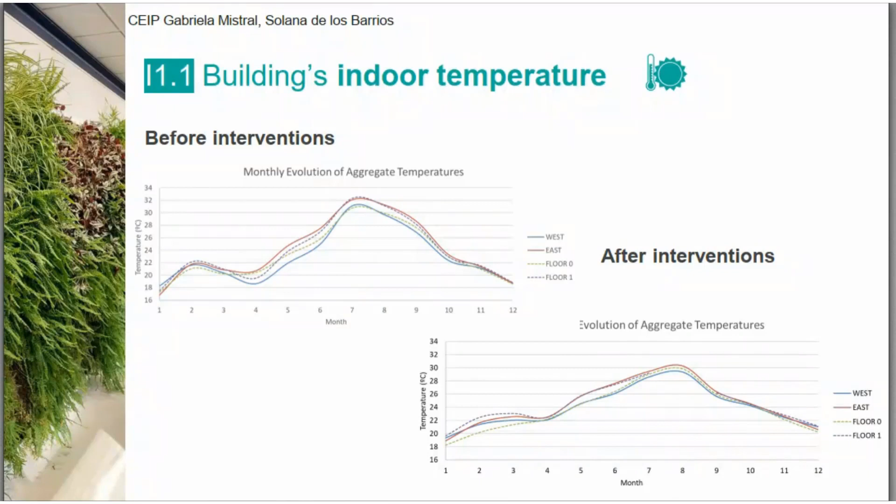An application of this indicator could be to assess the impact of installing a green roof. To do this, data from two classrooms located on the same east-facing facade at Solana de los Barros School were collected. One of them was situated under an intervened roof, while the other, used as a reference, was on the ground floor with a floor between the classroom and the roof.

In general, it can be observed that temperatures under the green roof have been lower than expected compared to those in the reference classroom. Furthermore, the month of May 2022 had average temperatures more than 1 degree higher than those of previous years inside the school. Additionally, if we analyze the average temperatures of the area using data from AEMET for Mérida, there has been a 9% increase in daily average temperatures in 2022 compared to previous years.

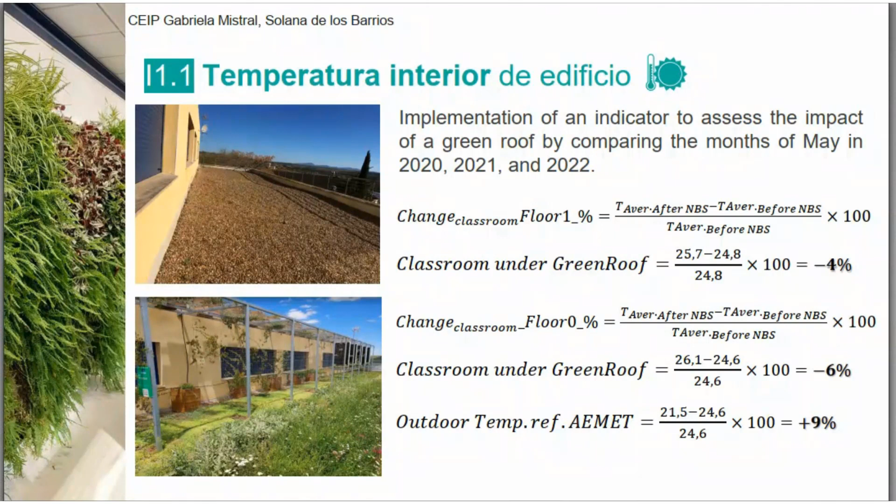For the building surface temperature indicator, the thermal images of the school Gabriela Mistral envelope are shown. The entire envelope was photographed before and after the installation of the NBS. This and the next slide show the images taken on the 8th of June of 2022, 7 months after the end of the construction of the solutions.

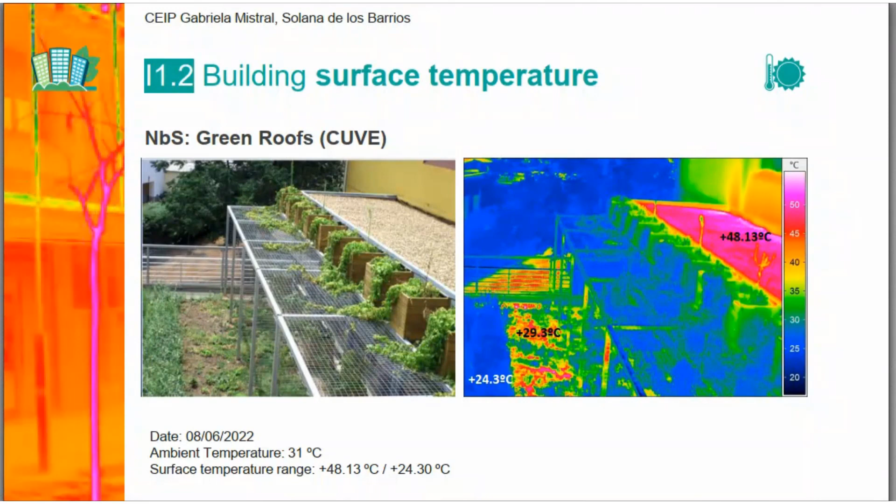The surface temperature of the roof is affected by the installation of the three types of green roofs. The thermal images show that the surfaces of the green roofs have a lower surface temperature than the original gravel roofs. The difference in temperature is very notable, and there are also differences between the green roof types depending on the type of vegetation and the degree of vegetation cover.

In this slide, we see the thermal images of the east facade where the FAVE system is implemented. The thermal images show that the surfaces associated with the FAVE system have a lower surface temperature than the surfaces that maintain the original characteristics. This is thanks to the shading provided by the system. At the moment, this difference is smaller, mainly because the vegetation has not yet completely covered the structure, having a lower impact.

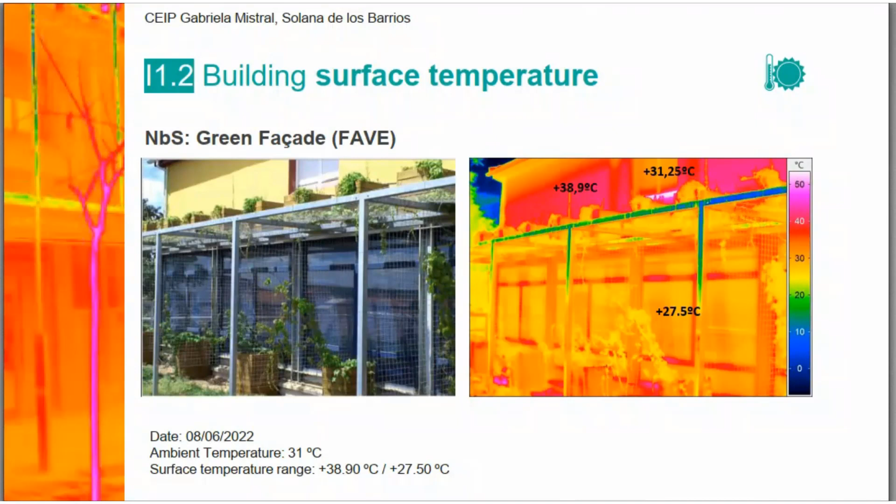To assess the impact of the solutions on the external environmental conditions of the building, we can observe that in general, in 2022, outdoor temperatures were 9% higher. However, on the east facade, the one subject to overall intervention at the school, there was a decrease of 1% in average temperatures and 17 in maximum temperatures. This is primarily associated with the partial shading of the facade already achieved.

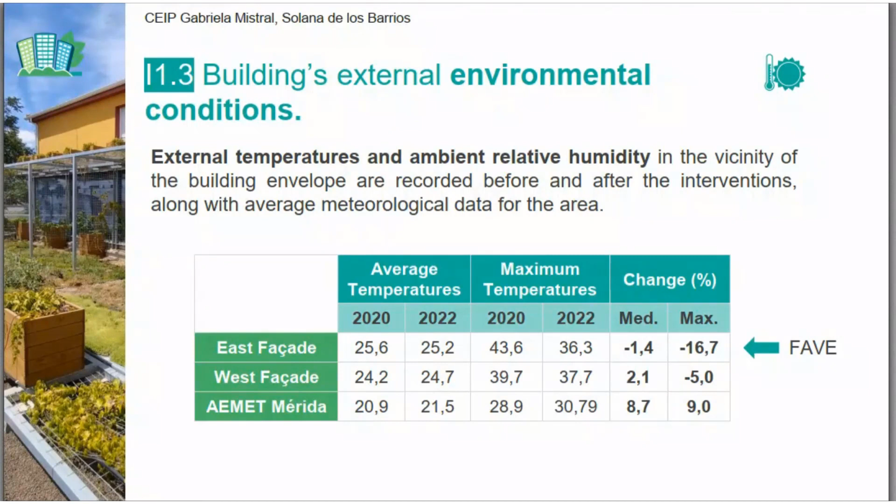On the west facade, there is only a 2% increase in averages and a 5% decrease in maximum temperatures. It is important to note that the facade interventions still had the vegetation underdeveloped, although irrigation is underway and having an effect. Hence, greater reductions are expected in the coming years.

This indicator shows the reduction of the cooling demands thanks to the application of NBS through dynamic building simulations. The modeling of the energy savings produced by the implementation of NBS shows that by adding the different solutions, a reduction of cooling demand of more than 50% can be achieved.

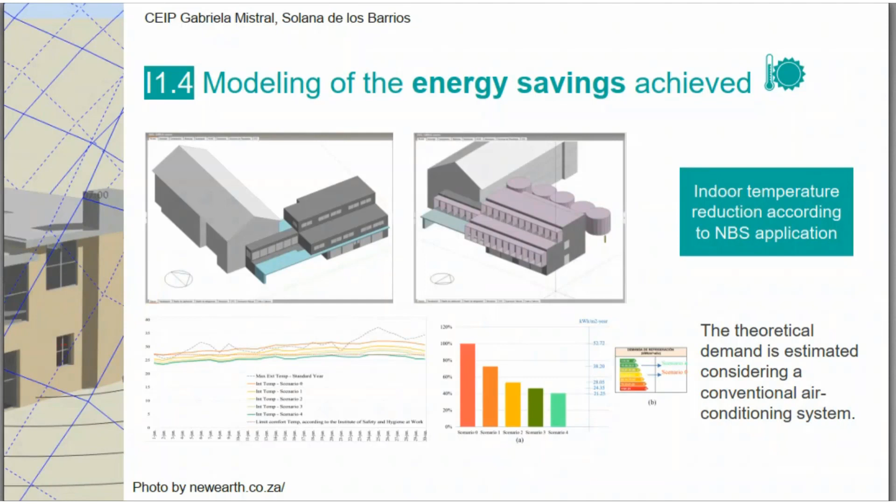It is important to note that these results can serve as a guide for the starting point of analysis. Further research is needed to investigate the behavior of the different solutions in order to achieve greater similarity between the actual performance and the results shown by the simulations.

The results of the water management challenge indicator are shown next. During the construction phase, an increase in water consumption is observed due to the construction activities themselves, and also in the first months of operation of the NBS, as the plant requires more careful watering in order to root well and not die. However, the effect of long-term savings is expected to result in effective savings in irrigation. The image corresponds to the school in Oporto.

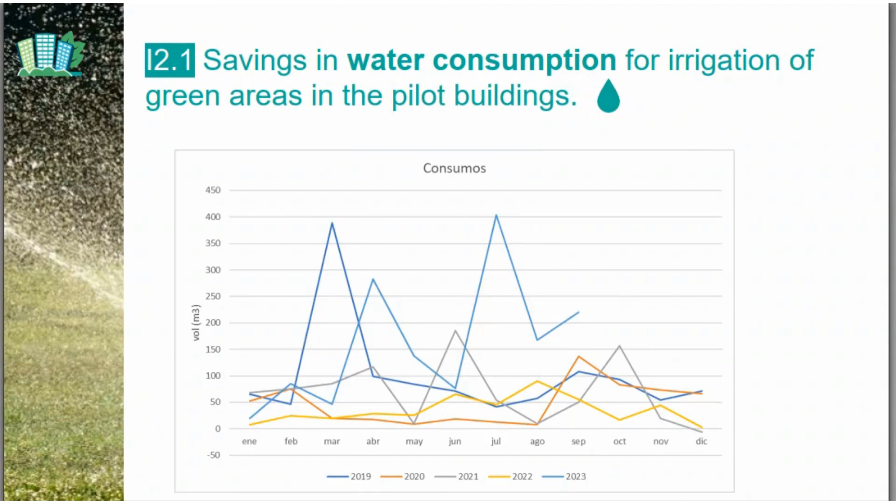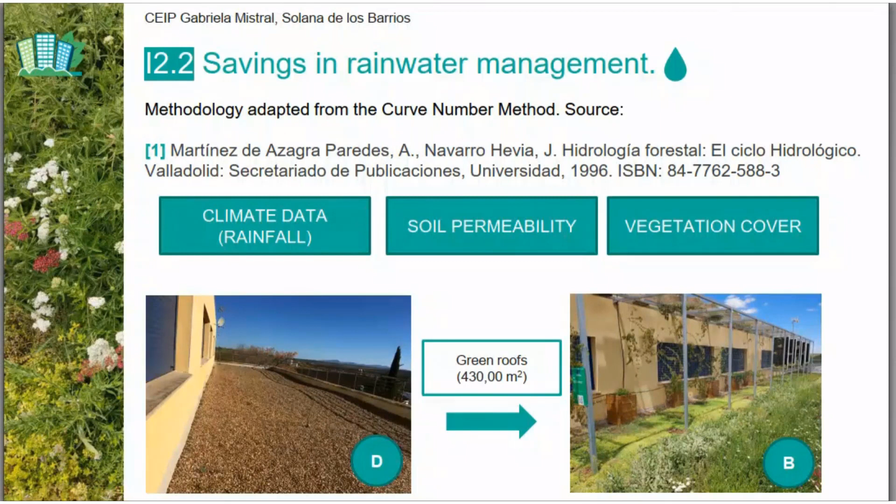The method used is an adaptation of the curve number method to the type of roofs. We have analyzed the change in roof type in terms of permeability and calculated how much water is captured before and after the installation of the NBS. After calculating the values of catchment and runoff, an ex-ante and ex-post evaluation has been carried out, theoretically estimating the percentage of runoff water in both cases.

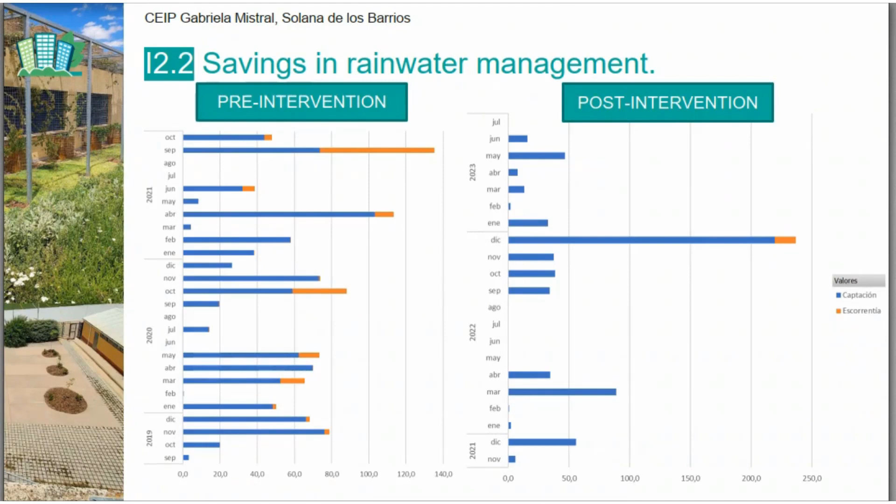In the pre-intervention situation, it is estimated that 952 millimeters of rainwater has been captured and a total of 143 millimeters has been emitted by runoff, which means a loss of 13% of water by runoff. In the ex-post situation, it is estimated that 635 millimeters of rainwater has been captured and a total of 17 millimeters has been emitted as runoff, representing a loss of 3% of water through runoff.

The results of the indicators of the Green Areas Management Challenge are shown next. In the case of Solana, there has been a significant increase in biodiversity since the installation of the NBS. In the baseline sampling, 29 species were counted, which increased to 70 just after the installation of the NBS and subsequently increased by a further 36 species. This brings the total to 91 species in June 2023.

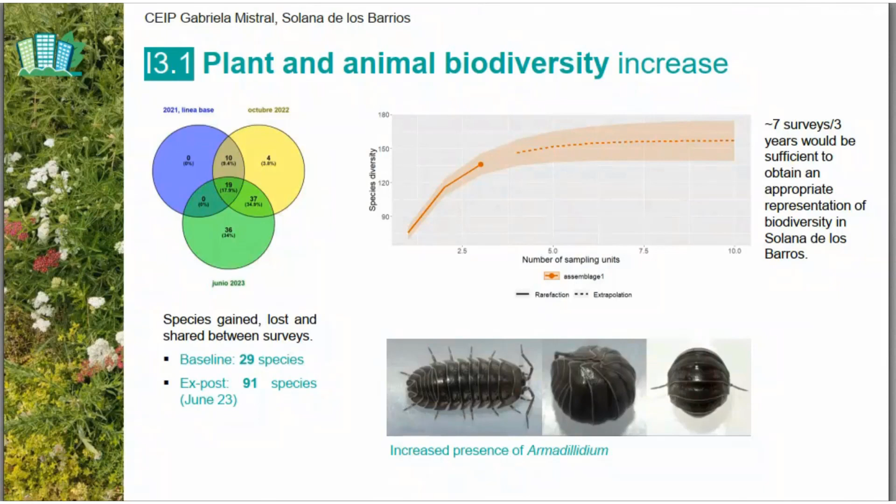While none of the species planted in the NBS have been lost to date, their density has decreased, while the density of native species that have colonized new areas has increased. Analysis of Hill numbers to estimate the number of observed species, characteristic species, and dominant species indicates that the total number of species estimated for the area is 157, with expectation of reaching the figure after 7 surveys or 3 years. Of particular importance is the increase in population of several species of bugs because they are detritivores capable of metabolizing heavy metals and thus removing them from the substrate.

In the baseline carried out before work began in Solana, 50 plant species were found, all of them ruderal and of little landscape value. The aim of the plant species initially planted on the green roofs was to facilitate colonization by native species over time. Indeed, 14 months after the planting of the NBS, the green roofs have been colonized by 17 additional native species, some of which already cover a considerable area, while the plants used in the planting reduce their area.

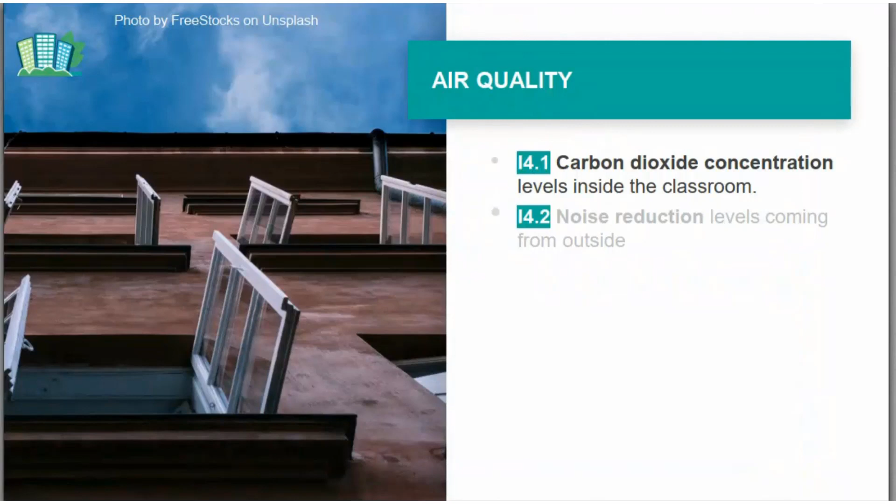The results of the air quality challenge indicators are shown next. Below are the initial results of the indicators for carbon dioxide concentration levels inside the classroom, the profile of average CO2 concentration in classrooms, which provides an insight into indoor air quality, and the level of ventilation, which has been significantly altered due to changes in habits following the COVID-19 pandemic.

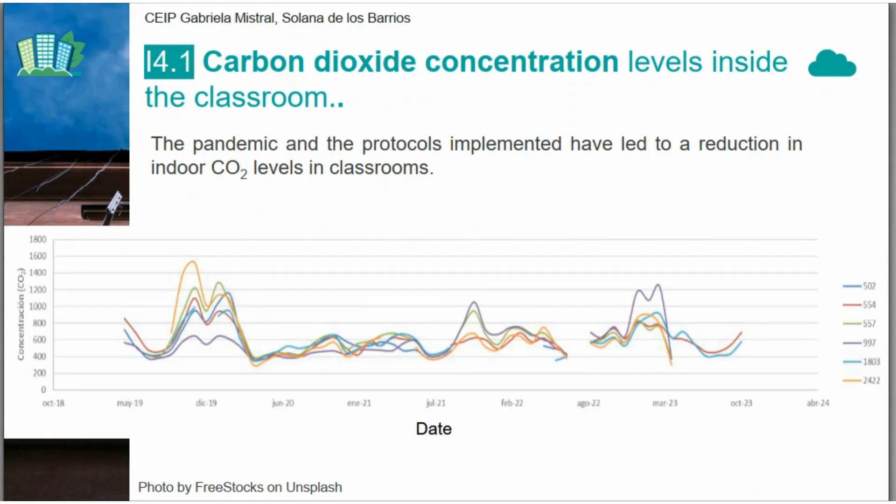The ventilation protocols implemented led to a significant reduction in CO2 levels, with many classrooms experiencing a decrease of more than 50%. However, during the 2021-2022 academic year, there has been a relaxation in ventilation measures compared to the previous winter. Although peak values above the recommended levels are observed, the average values during school hours are acceptable.

A direct application of recording CO2 concentrations is the selection of necessary ventilation periods to maintain values within the recommended rates. Monitoring concentration values provides us with the time of day when levels may reach high levels. By combining these profiles with outdoor temperature profiles, we can identify the most suitable times for opening doors and windows and for how long. This applies to both summer and winter, albeit with different timing. If automatic windows are available, their programming can be easily adjusted periodically to accommodate these findings.

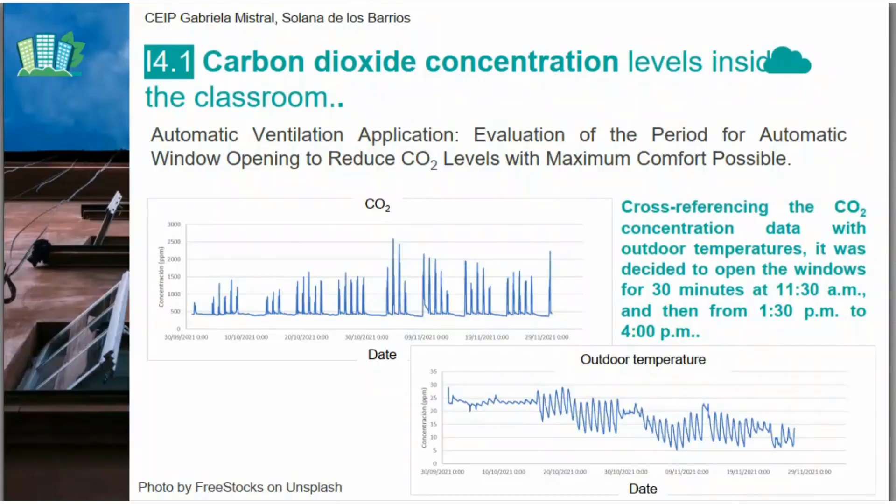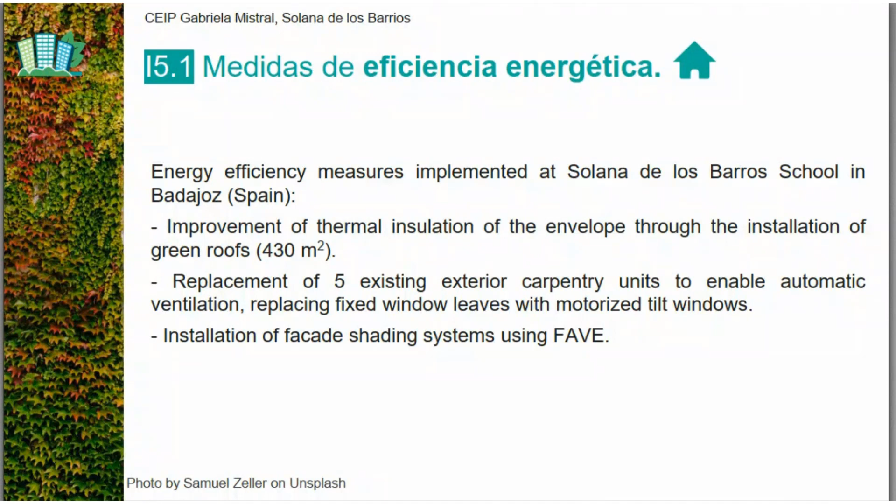The results of the indicators for the Urban Regeneration Challenge are shown below. In this indicator, we have reflected the main measures that improve the energy efficiency of the building. Regarding the energy consumption of the school based on electricity bills, it can be observed that energy consumption during winter has decreased over the years. However, the behavior during the summer months is unclear. In the hottest months, when the school is closed, July and August, energy consumption seems to have increased.

This fact will need to be reviewed and verified by Diputación of Badajoz in the following years to evaluate if the facilities are properly shut down and if the contribution of the irrigation system is significant. In this regard, adjustments to the pumping station will need to be reviewed to reduce the energy consumption of the pumps. On the other hand, the trend during hot months with the presence of students is unclear. While consumption seems to stabilize in May, it appears to decrease significantly in September and October.

This may be due to the improved shading and thermal insulation provided by the FAVE system, leading to the opening of curtains on the east facade, reducing energy consumption for lighting, and lowering temperatures, thereby reducing the use of fans and other portable cooling equipment in the school. However, these trends will need to be evaluated in the coming years as the FAVE system becomes more developed and the effects of the pandemic years dismissed.

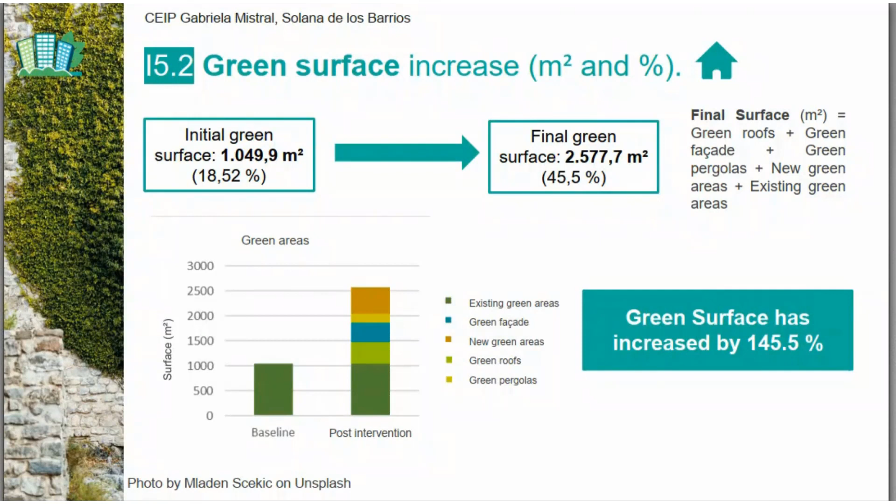The results of the indicators for the Governance and Participation Challenge are shown below. Surveys have shown the general interest of the educational community in the project. Likewise, the degree of knowledge about the ecosystem services provided by the NBS has increased at the end of the project. Pupils, parents, and teachers have had the opportunity to learn about the project, its objectives, and the functioning and benefits of the NBS. In this sense, it could be advisable to continue working in the community to disseminate the principles of the project and to carry out participatory management and maintenance of the installed NBS.

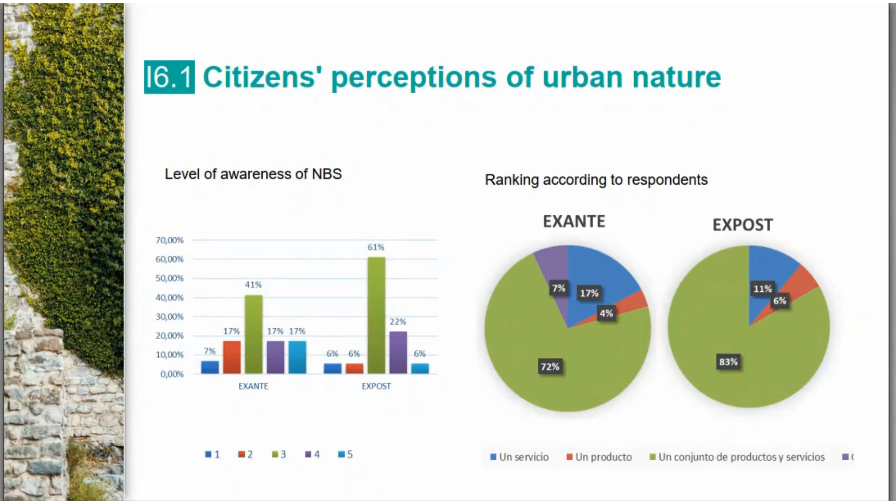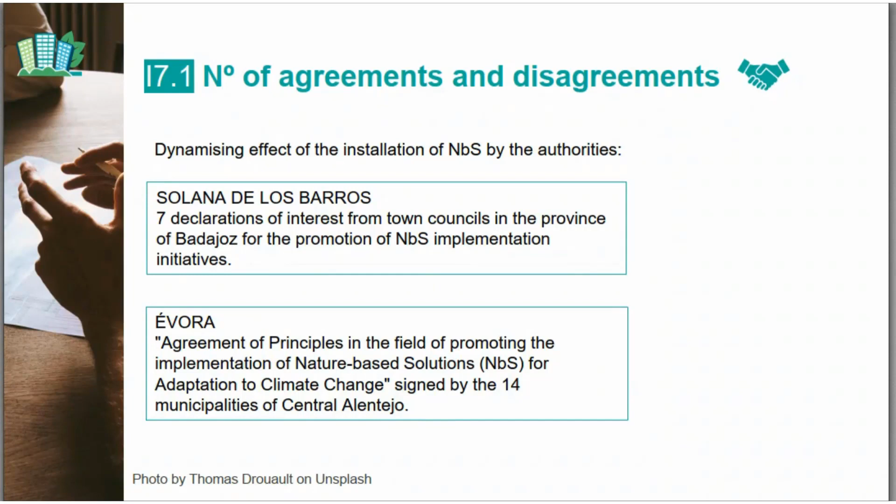The results of the indicators for the Social Cohesion Challenge are shown next. We wanted to highlight the importance of NBS in the dynamization of future collaborations. As an example, with the aim of favoring the future replication of NBS in other municipalities, 7 municipalities in the province of Badajoz have signed a declaration of interest for the promotion of NBS implementation initiatives, and 14 municipalities in the central Alentejo of Portugal have signed an agreement of principles in the field of promoting the implementation of NBS for climate change adaptation.

In conclusion, the My Building is Green project has provided valuable observations on the implementation of NBS in school settings, although the monitoring of some indicators has presented measurement challenges due to the difficulty of obtaining data or the need for longer monitoring time. The results in schools such as Solana de los Barros in Badajoz are positive. Achievements such as significant reductions in indoor temperatures, water management, increased biodiversity, and active engagement of the educational community are highlighted. Taken together, these findings support the effectiveness of the project and offer valuable insights for the future implementation of NBS in educational settings.